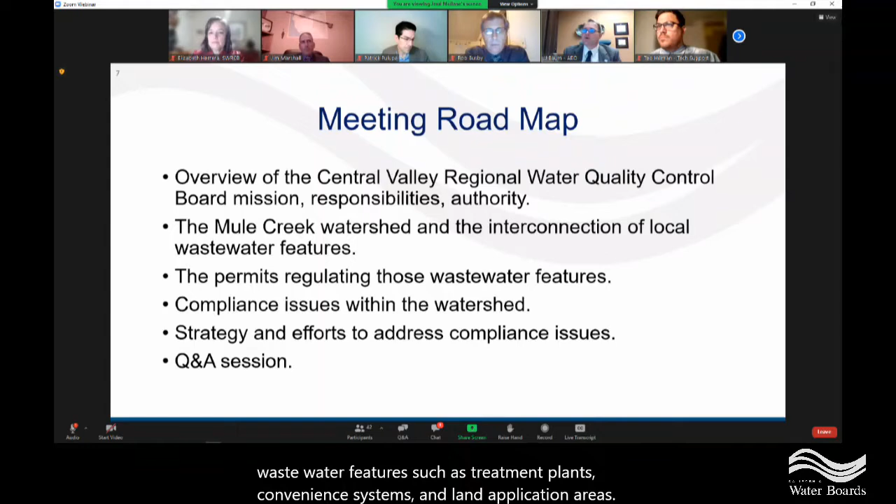We'll start our discussion with the Regional Board's mission, responsibilities, and authorities as they pertain to water quality. My staff will then give a high-level description of the Mule Creek Watershed, including the wastewater features such as treatment plants, conveyance systems, and land application areas. These features are regulated by our board through various permits to ensure the conveyance, treatment, and disposal of wastewater does not impact water quality. Our office issues permits to wastewater facilities that contain requirements to ensure water quality is protected. Because of the variety of wastewater facilities we regulate, our office has several programs, each covering a different category or type of facility.

Due to the many operations going on in the Mule Creek Watershed, several of these programs are part of our discussion. We will hear a bit about each type of permit from the folks that work in those programs, including the Land Disposal Program, the Municipal Stormwater Program, and the Sanitary Sewer System Program. Once we get through that background, we will hear from our Compliance and Enforcement section about some of the issues that have been occurring in the Mule Creek Watershed. And finally, we will present our progress tackling these issues so far and our plans going forward.

After that, we will open up the floor to hear from you for a question and answer session. Keep in mind that this is a complicated watershed with a lot of interconnected facilities and moving parts. We have kept this presentation high level to provide a digestible but meaningful overview of the complete situation that won't take all night. However, if you would like a more detailed discussion about any of these topics, staff would be happy to have those conversations with you and are available by phone or email.

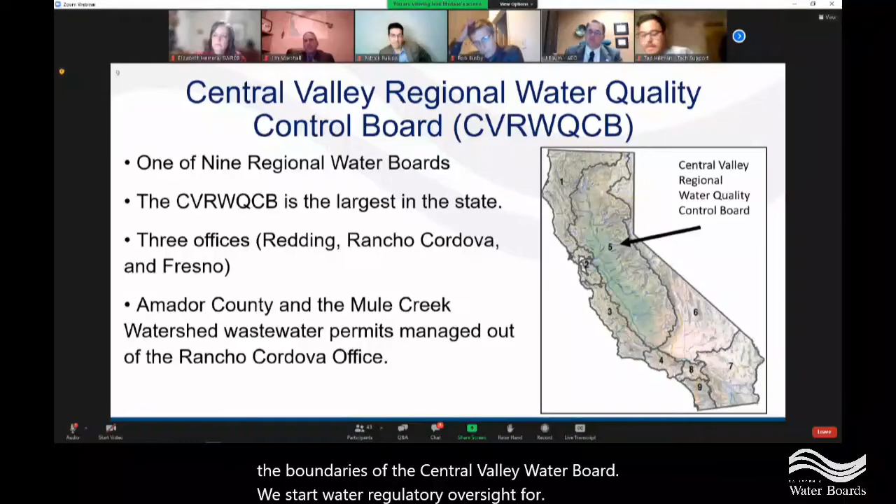So I'd like to state our Central Valley Board's mission statement: to preserve, enhance, and restore the quality of the Central Valley region's water resources for the protection of the environment, public health, and all beneficial uses, for the benefit of present and future generations.

Our agency is responsible for the implementation and enforcement of water quality regulations within our region. These include the Federal Clean Water Act, through the issuance of National Pollutant Discharge Elimination System permits that regulate discharges to surface waters. This is done in partnership with the United States Environmental Protection Agency, or US EPA. Additionally, we regulate discharges to surface and groundwater through the California Water Code, or Porter Cologne Act. Please note that our regional board does not regulate drinking water; that is done by the Division of Drinking Water through the State Water Board.

We use many tools to effectively implement these regulations on surface and groundwater, including permits, establishing waste discharge requirements, and even issuing enforcement orders to those not meeting their discharge requirements. Several of these tools we will be discussing today and how they are used by our staff in the Mule Creek watershed. Additionally, we wanted to share some of the actions we have taken to protect and better understand the water quality in your watershed.

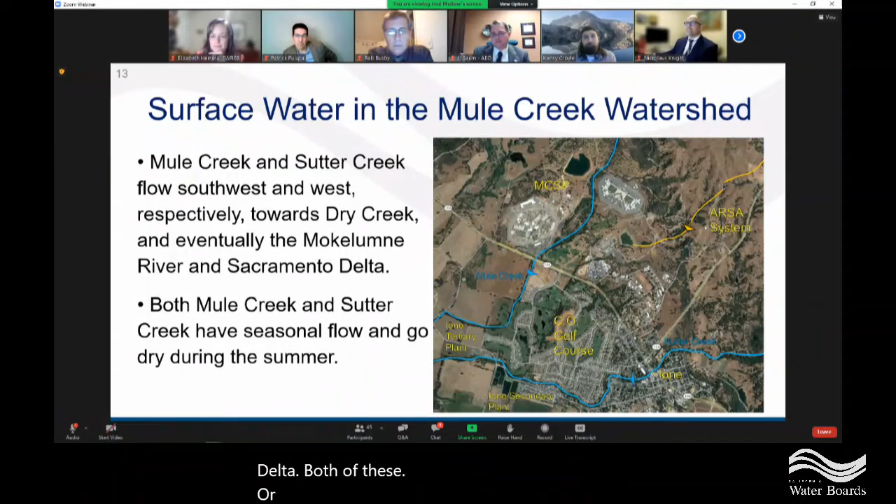Groundwater recharge occurs in the local watershed through percolation of treated wastewater or effluent from storage and disposal facilities. I'll give you a brief summary of these features and the facilities that contribute to groundwater recharge, and then show you how they're all interconnected on the next slide.

There are two large unlined storage reservoirs at the Mule Creek State Prison. The Castle Oaks Golf Course has several smaller unlined storage ponds as well. The City of Ione wastewater plant also has two unlined ponds, which are operated as percolation basins.

Land application areas used for the spray irrigation of effluent are located at Mule Creek State Prison property and at the City of Ione wastewater treatment plant. The Castle Oaks Golf Course also spray irrigates with tertiary treated effluent, which we will talk about more in a minute. Residential landscape irrigation in the neighborhoods also contributes to groundwater recharge.

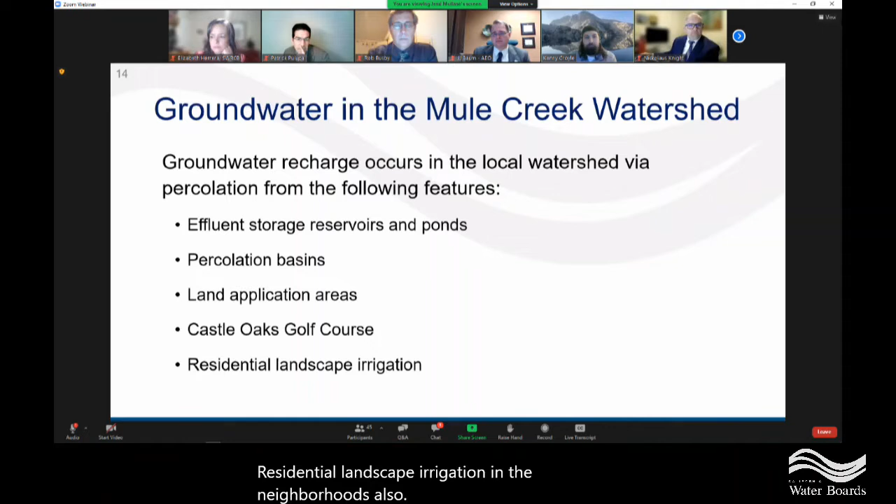In the lower right-hand corner, the City of Ione treatment plant receives wastewater from the city sewer system and sometimes Preston Reservoir, which it treats and then disposes of on its own percolation ponds or on-site spray fields.

In the upper right corner, the City of Sutter Creek sends treated wastewater through the ARSA conveyance system to Preston Reservoir. From there, the effluent can be either sent to the City of Ione plant or the tertiary plant for further treatment.

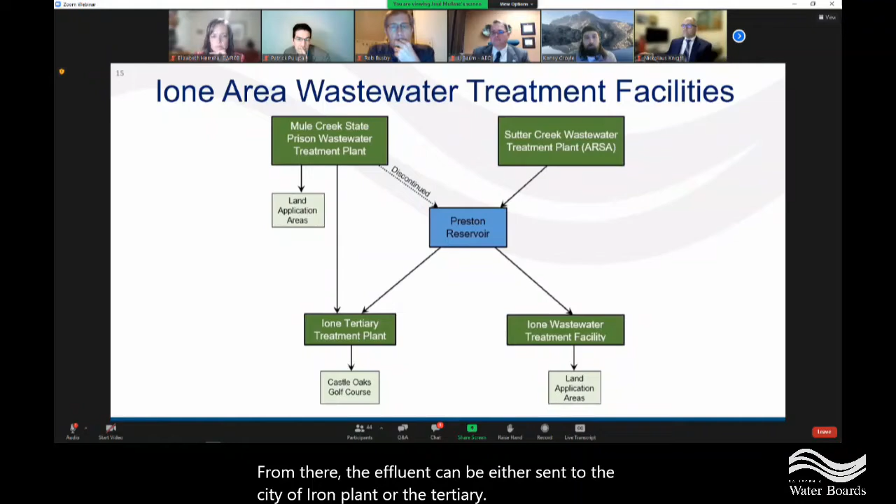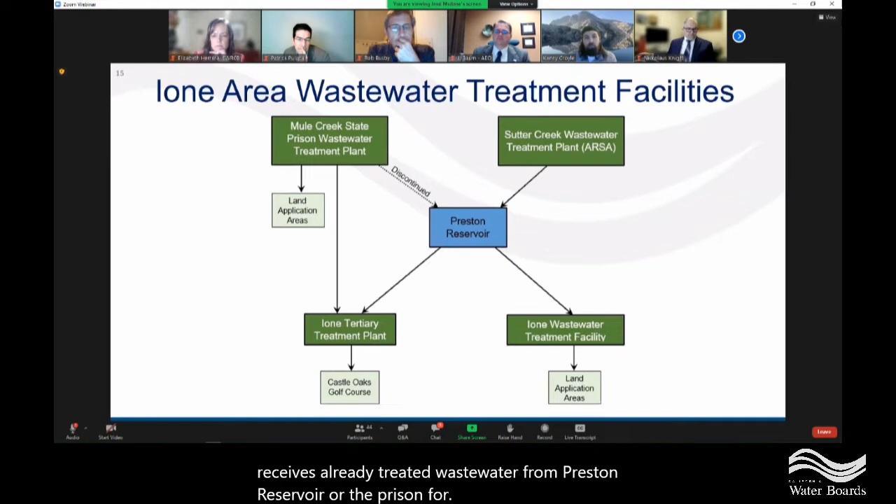In the lower left corner, the Ione tertiary plant receives already treated wastewater from Preston Reservoir or the prison for further treatment and eventual reuse on the Castle Oaks Golf Course. Tertiary treated water can be used to irrigate public spaces such as golf courses under certain conditions.

As you can see, these facilities are all connected, but not all of these connections are active all of the time. Water is intermittently transferred between the facilities based on agreements between the parties, usually during the summer months to reduce volume of stored effluent in the reservoirs and to irrigate the golf course.

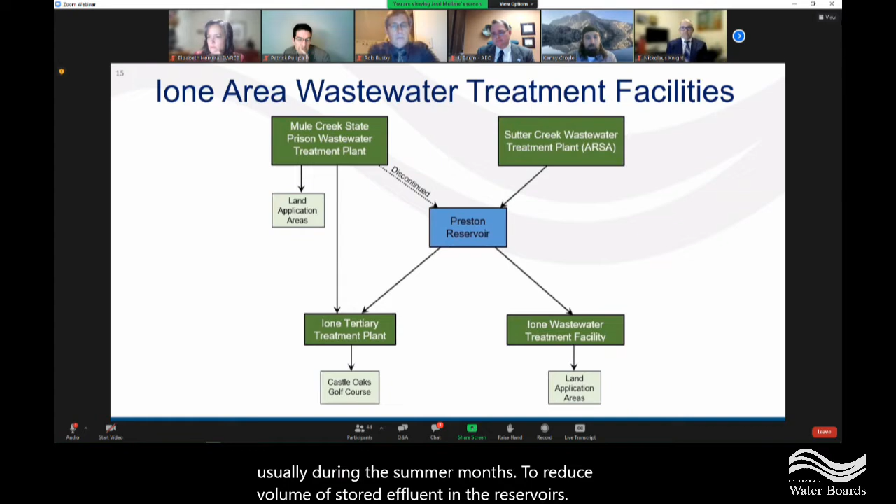Now I'm going to hand it off to Scott Armstrong to talk to you a little bit about the permits that regulate the wastewater operations at these facilities.

Thank you, Kenny, and good evening. My name is Scott Armstrong. I am a senior engineering geologist and manager of the Waste Discharge to Land Permitting Unit here in the Central Valley Water Board. In the next few slides, I'm going to summarize this program and provide a status of our permitting activities for the wastewater facilities discussed during this presentation.

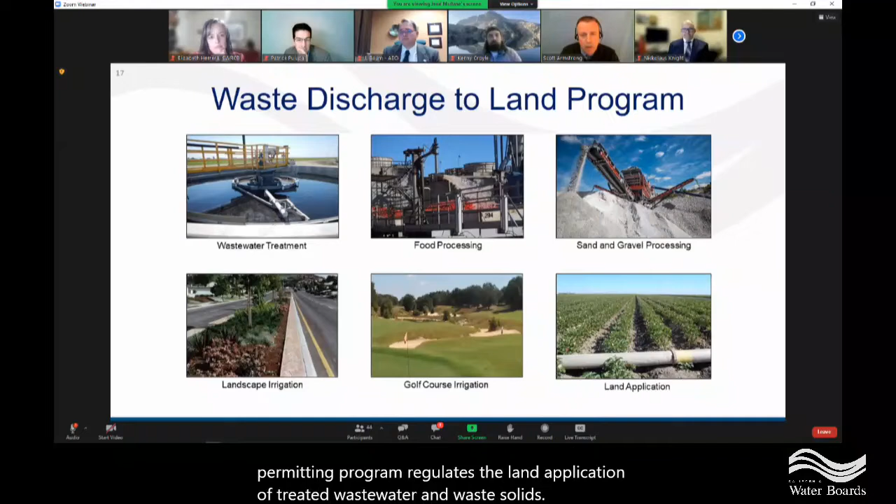The Waste Discharge to Land Permitting Program regulates the land application of treated wastewater and waste solids to protect groundwater, which is considered a beneficial resource. This is achieved by developing and issuing permits that allow land disposal or the reuse of waste products in a manner that does not negatively impact groundwater quality.

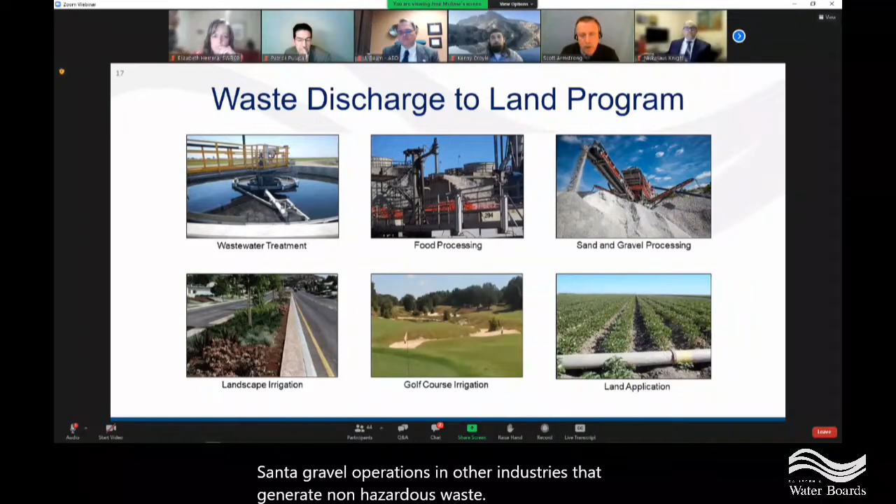Permittees include sewage treatment and wastewater recycling facilities, food processors, sand and gravel operations, and other industries that generate non-hazardous waste. This program currently regulates over 1,400 facilities in the Central Valley.

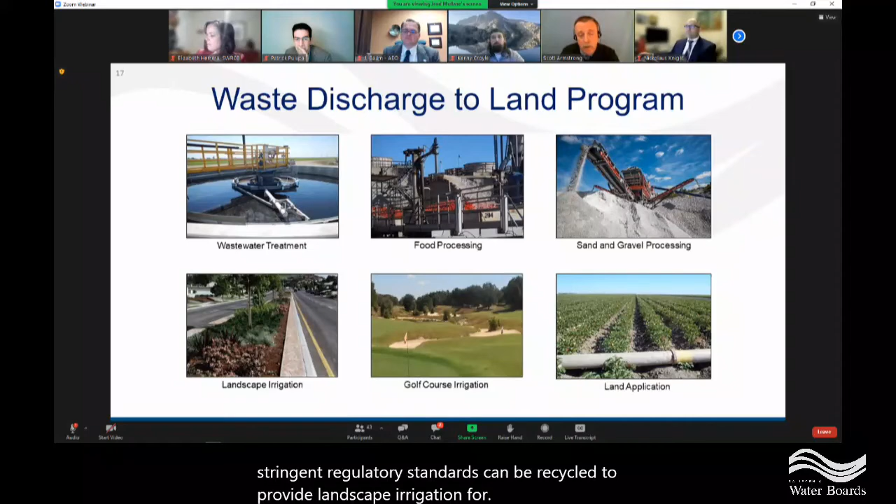One of the priorities of the Water Board is to protect water resources here in the Central Valley. Thus, discharging some waste types to land is allowed to support water conservation efforts, provide supplemental irrigation, and reduce overloading of local landfills. For example, treated wastewater that meets stringent regulatory standards can be recycled to provide landscape irrigation for highways, parks, and golf courses.

As Kenny previously mentioned, the Ione area includes several wastewater treatment facilities that discharge treated wastewater to land. These include the Mule Creek State Prison Wastewater Treatment Plant, the City of Ione Tertiary Treatment Plant, the City of Ione Wastewater Treatment Facility, and the City of Sutter Creek Wastewater Treatment Plant, which is managed by the Amador Regional Sanitation Authority, also called ARSA.

I want to take a moment here to explain the terminology we use for these different levels of wastewater treatment. Secondary treatment utilizes biological and physical methods to break down organic compounds. Tertiary treatment includes those processes in addition to filtration to further reduce residual waste components to achieve better water quality. Disinfection is then applied to destroy pathogens and remaining organic compounds, including viruses.

Title 22 of the California Code of Regulations defines ways that recycled water can be used, depending on the level of treatment.

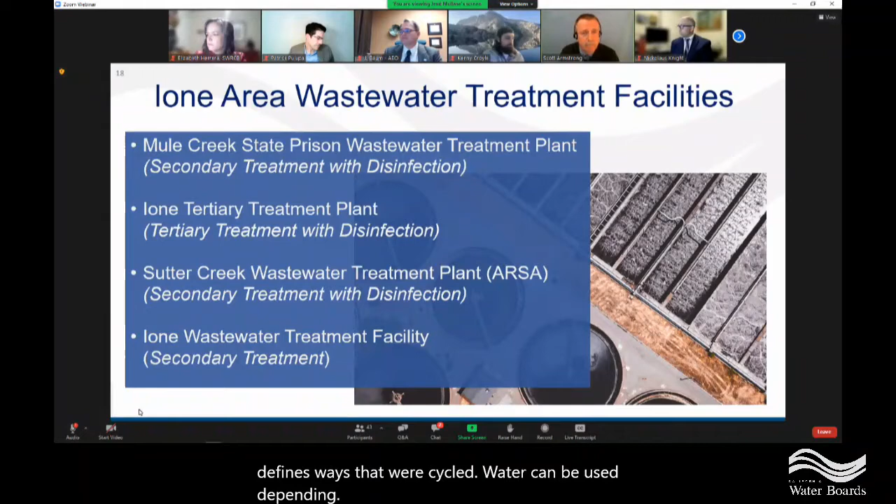The permit mechanism that allows waste discharge to land is called Waste Discharge Requirements, or WDRs. The WDRs require that all waste applied to land meet specific treatment standards and comply with allowable limits that are protective of groundwater.

These requirements include treatment levels that must be achieved and limits on the volume of water that can be discharged to prevent flooding or overloading of soils. Other protective measures include restrictions on nuisance odors and setback requirements from property boundaries, domestic water wells, and surface water, such as creeks.

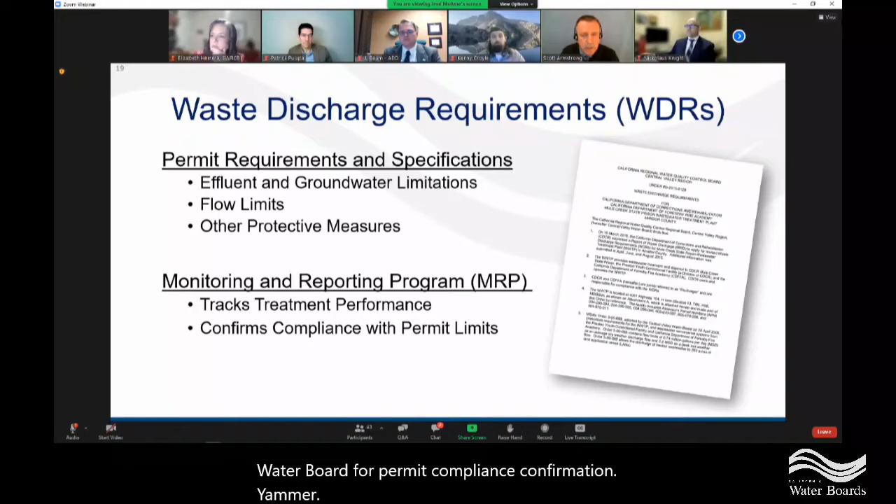All WDRs include what's called a monitoring and reporting program, or MRP, that is used to verify compliance with the requirements set forth in the permit. The MRP includes requirements for routine sampling at various stages in the treatment and disposal process, laboratory testing, and reporting of the results to the Central Valley Water Board for permit compliance confirmation. The MRP also requires routine visual inspections of treatment and land discharge activities.

All WDRs need to be periodically updated to accommodate changes in treatment facility operations and new regulatory requirements. The permitting process typically begins with the owner of a wastewater treatment facility preparing a report of waste discharge. This document summarizes information about the waste character, the type of treatment at the facility, the expected annual flow, and how the treated waste will be discharged to land without negatively impacting groundwater or creating nuisance conditions.

Permitting staff review this document along with all relevant monitoring data to develop a draft permit. Once prepared, the draft permit is reviewed by Water Board management before being made available for public review. After all comments have been collected and evaluated, the permit is updated to reflect any appropriate revisions and presented to our board for their consideration and formal adoption during a public meeting.

Permit development is a deliberative process that must address all applicable requirements, stakeholder concerns, and ensure that compliance can be reasonably achieved. The typical process time for preparing new or revised WDRs can vary depending on the backlog of other permits, project complexity, and staff availability. Prioritization for updating and preparing new permits is based on the threat to water quality.

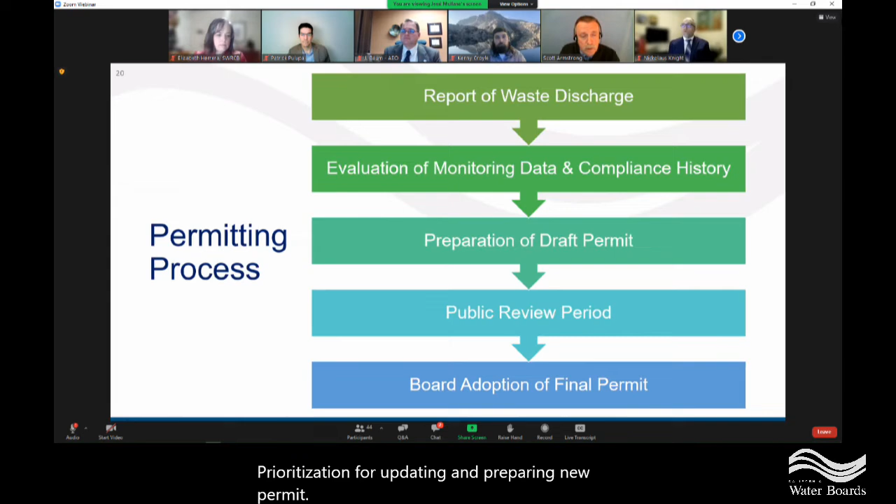So where are we at currently with the permitting process? In October 2021, revised monitoring and reporting programs were issued for Mule Creek State Prison Wastewater Treatment Plant and the City of Ione Tertiary Treatment Plant, which includes the Castle Oaks Golf Course.

The purpose of revising these monitoring requirements is to collect more comprehensive data in advance of updating the WDRs for these two facilities. In the coming months, the additional monitoring data will be reviewed by staff to determine the appropriate requirements and limits for the protection of groundwater quality.

Water Board staff are also currently reviewing a report of waste discharge recently submitted for the Mule Creek State Prison. The complicated relationship between Mule Creek State Prison, the City of Ione, and the Amador Regional Sanitation Authority requires careful coordination by the Central Valley Water Board to assure that all Ione area communities have reliable wastewater disposal that does not negatively impact groundwater. This concludes my portion of this evening's presentation.

And from here, I'd like to transition over to Elizabeth Lee, who will discuss the municipal stormwater system.

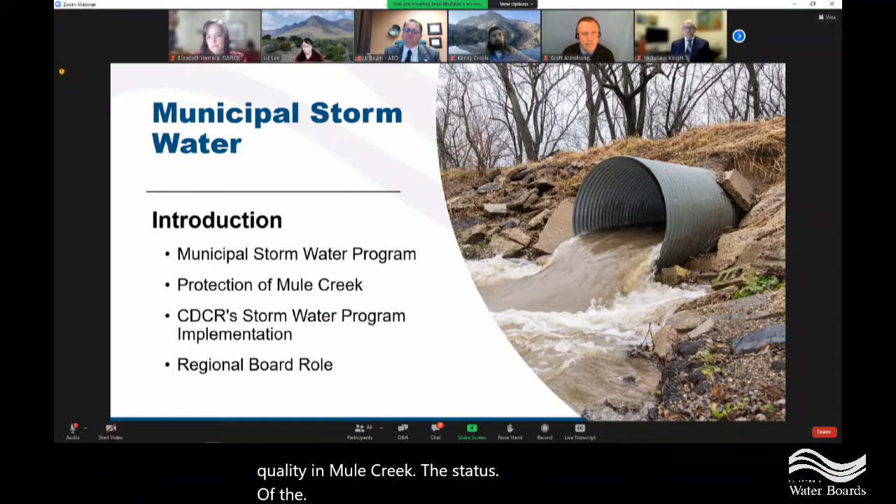In this presentation, I will cover a little background on the stormwater program, specifically the municipal stormwater program area, how stormwater regulation is important to protect water quality in Mule Creek, the status of the implementation of the stormwater program by the California Department of Corrections and Rehabilitation, or CDCR for short, and what regional water board staff are doing to ensure compliance.

So just a bit of background on the municipal stormwater program. The purpose of the program is to protect water bodies such as Mule Creek by minimizing impacts from stormwater systems. In 2019, the regional board required CDCR to obtain a stormwater permit from the State Water Board due to evidence that CDCR's activities were impacting Mule Creek.

The stormwater permit is an important tool because it has specific requirements for CDCR to reduce the stormwater impacts to Mule Creek, and it provides clear regional board enforcement authority to ensure the necessary improvements to the facilities and processes are completed by CDCR. The stormwater permit is a 5-year process to establish a full stormwater program, and CDCR is currently in their 4th year of stormwater program development.

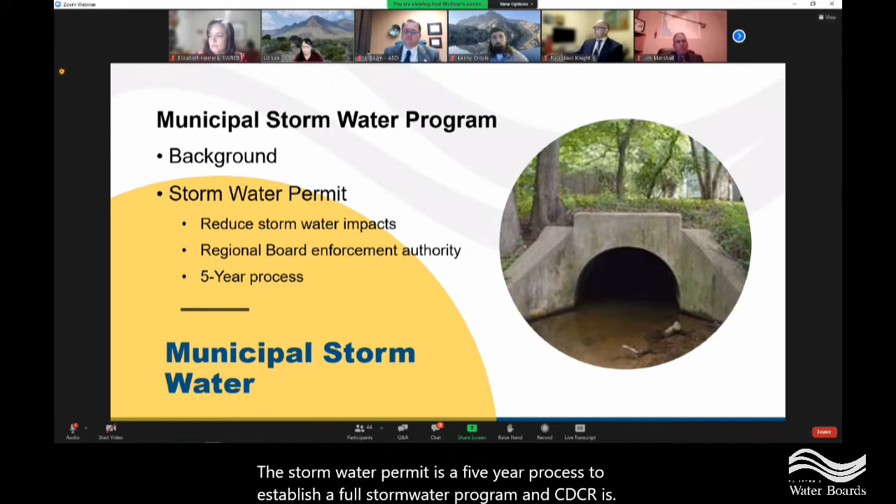Monitoring is not required under the stormwater permit, but due to concerns of stormwater impacts to Mule Creek while the stormwater program is in the process of being developed, the regional board issued a stormwater monitoring and reporting program to CDCR. This program requires monitoring of bacteria and other contaminants from CDCR's stormwater and in Mule Creek.

In addition, this program is used to evaluate CDCR's progress by providing data that shows stormwater quality improvement from the prison. So far, the program has resulted in CDCR determining the need for permanent structures to obtain accurate monitoring data and reducing excessive irrigation runoff during the dry season.

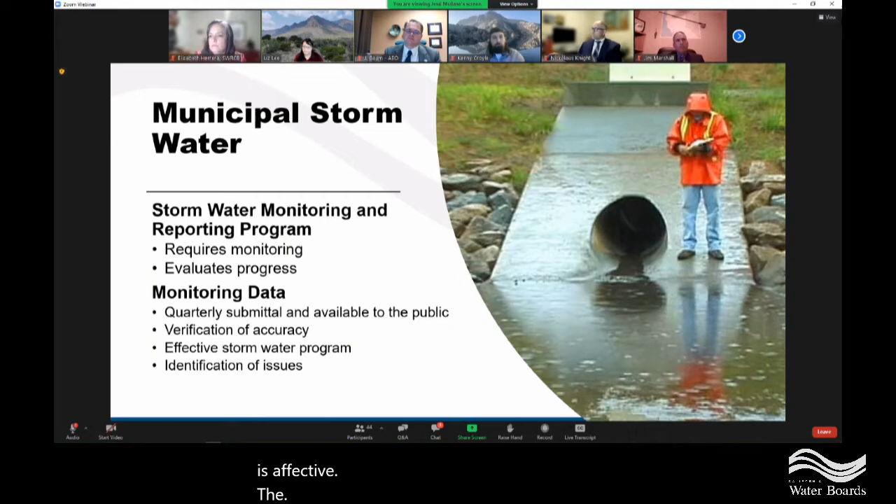Monitoring data are submitted to the regional board quarterly and are available to the public. The data are reviewed by regional board staff to verify accuracy and that CDCR's stormwater program is effective. The data is also used to identify any issues with their stormwater program.

Moving forward under the stormwater permit, CDCR will annually report on the implementation and improvements made to their stormwater program, and regional board staff will review these reports to ensure that the stormwater program is being properly implemented. By June 30, 2023, CDCR must have a fully developed stormwater program in place.

Under the Stormwater Monitoring and Reporting Program, quarterly verification of CDCR's stormwater program effectiveness will be reviewed by regional board staff. If the Stormwater Monitoring and Reporting Program does not demonstrate reduction in contaminants from the storm sewer system, CDCR will be required to develop and implement additional practices and processes and installation of storm sewer structural improvements.

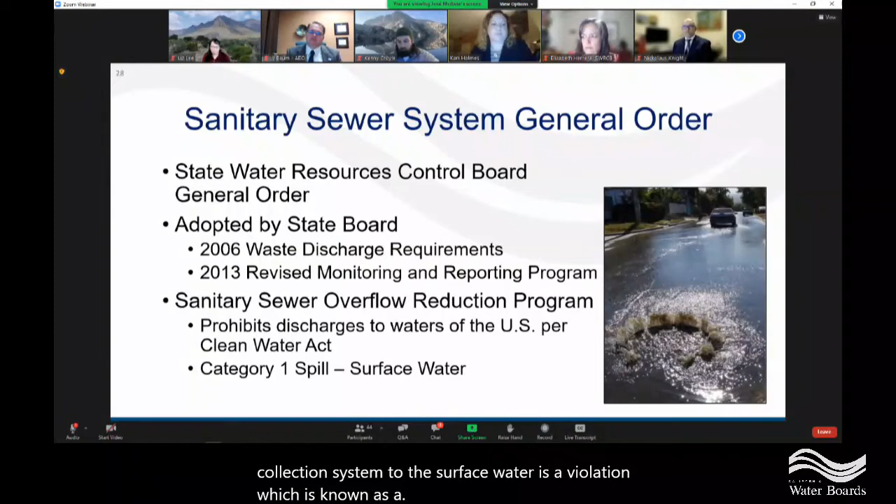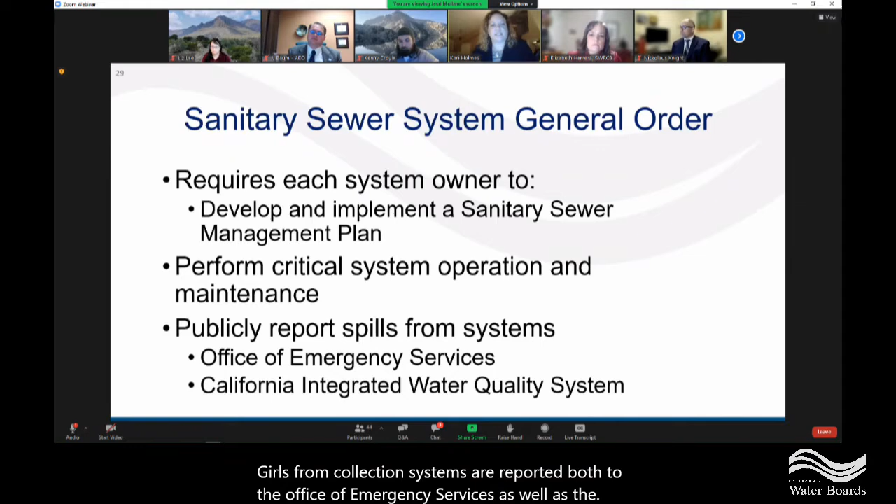Dischargers enrolled in the Sewer System General Order are required to develop and implement a sanitary sewer management plan, perform critical system operation and maintenance, and publicly report spills from collection systems. Spills from collection systems are reported both to the Office of Emergency Services as well as the Water Board's California Integrated Water Quality System database.

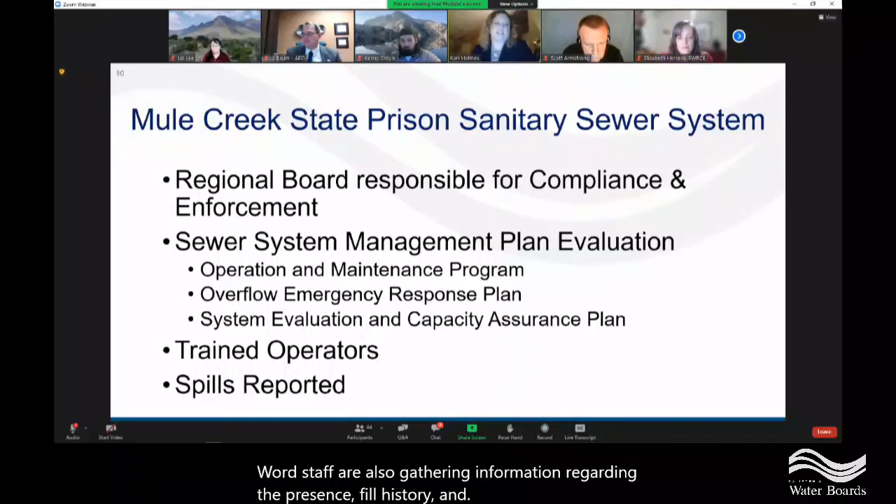Central Valley Regional Board enforcement staff are currently working to assess CDCR's compliance with the Sanitary Sewer System General Order. We are assessing compliance to ensure an adequate sanitary sewer management plan, which includes an operation and maintenance program, overflow emergency response plan, and system evaluation and capacity assurance plan, is in place, and that all facility staff have the appropriate training. Board staff are also gathering information regarding the prison's spill history and records of maintenance and repairs of their sanitary sewer collection system.

Now I will discuss compliance and enforcement efforts that have been taken, as well as ongoing compliance evaluations and next steps.

On December 28th of 2017, board staff received a complaint via phone call regarding an alleged illegal discharge of water from an unknown source directly into the perimeter stormwater system and subsequently entering Mule Creek. The complaint was from a third-party construction contractor who is completing a project to upgrade the perimeter stormwater ditch to an underground culvert and vault system.

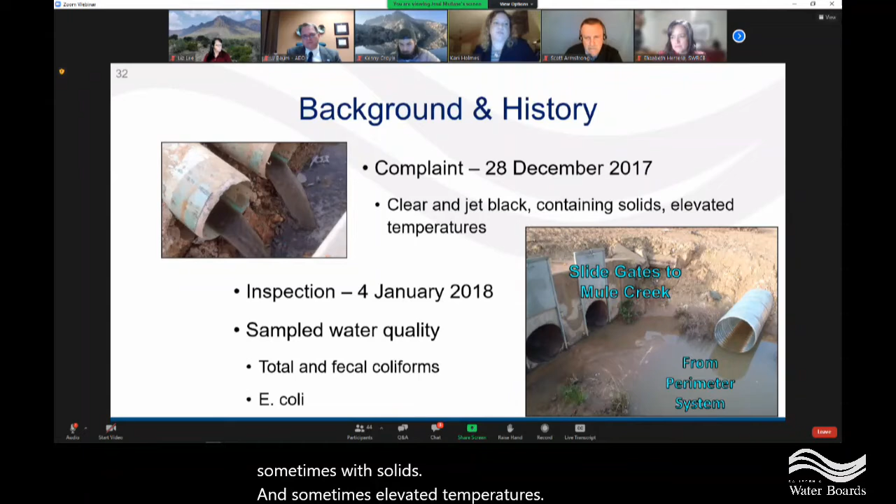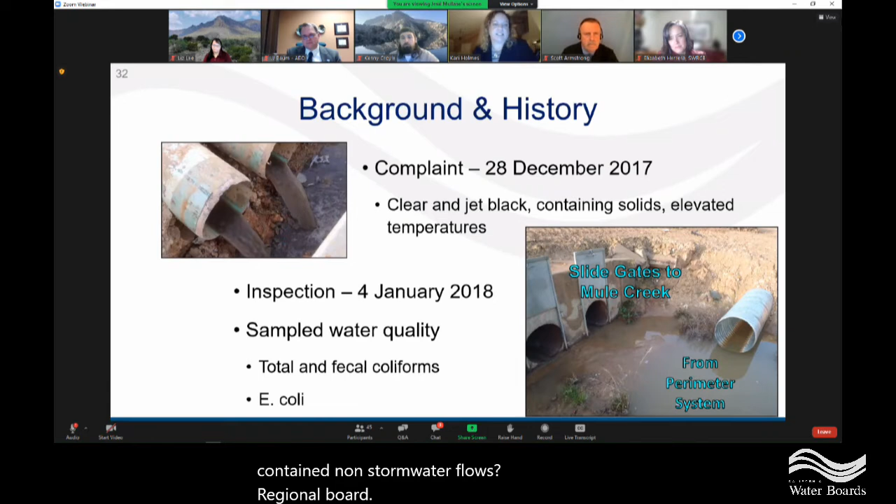Based on the complaint and supporting documents, board staff believe the source or sources may have contained non-stormwater flows. Regional board staff were able to conduct an inspection on January 4th, 2018. During the inspection, board staff observed discharges to the perimeter system similar to what was described in the complaint.

Board staff collected 2 samples from the stormwater system, which were analyzed for typical wastewater and stormwater parameters. Notably, total coliforms, fecal coliforms, and E. coli were detected at levels above water quality objectives.

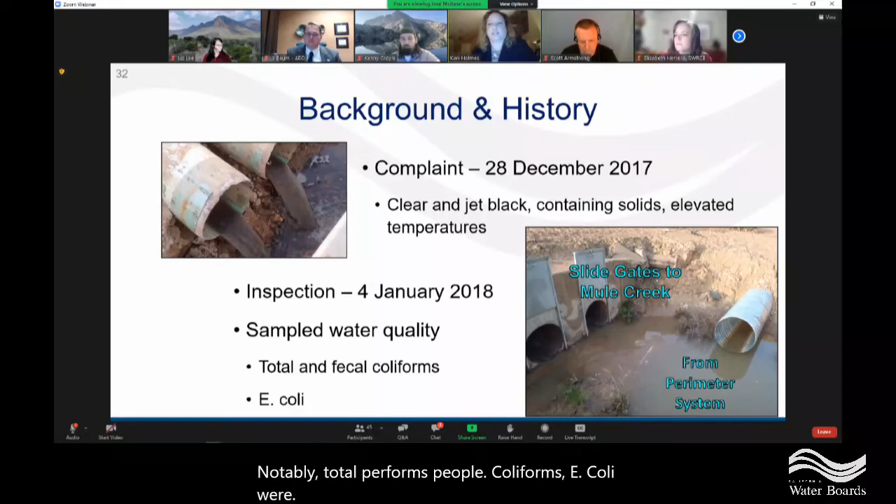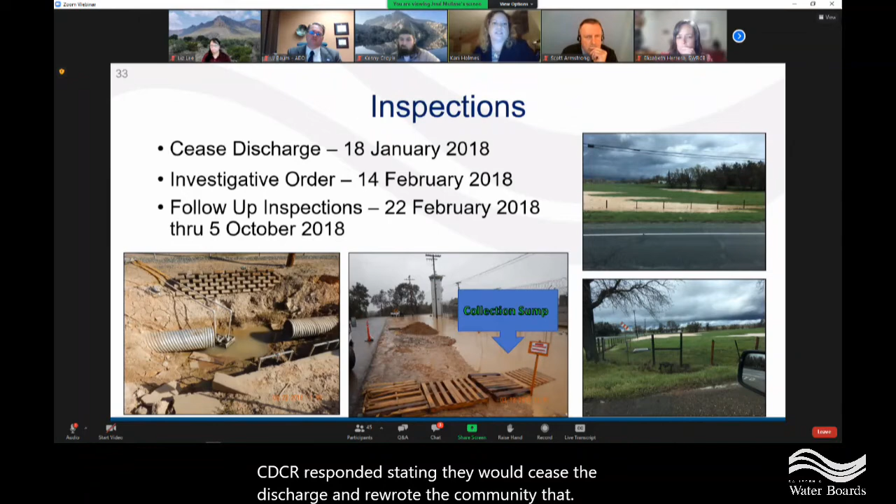As a result of the detected coliform, CDCR was instructed to cease the discharge via email on January 18, 2018. CDCR responded stating they would cease the discharge and reroute the contaminated stormwater to sewer cleanouts that lead to the on-site domestic wastewater treatment plant.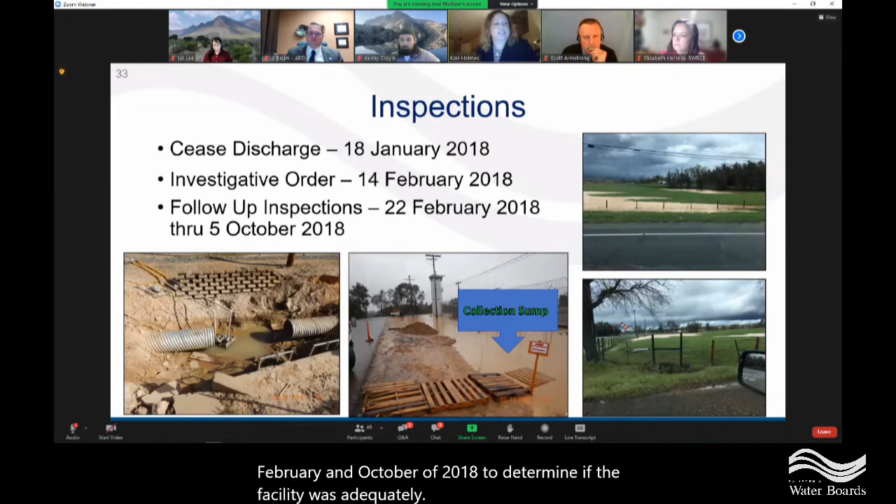In addition, the regional board issued an investigative order on February 14, 2018, that required CDCR to conduct a survey of their collection systems, also to collect water samples and investigate the source of the non-stormwater discharges. Board staff performed several inspections between February and October of 2018 to determine if the facility was adequately prepared for forecasted rain events and how the interim measures performed during the wet weather.

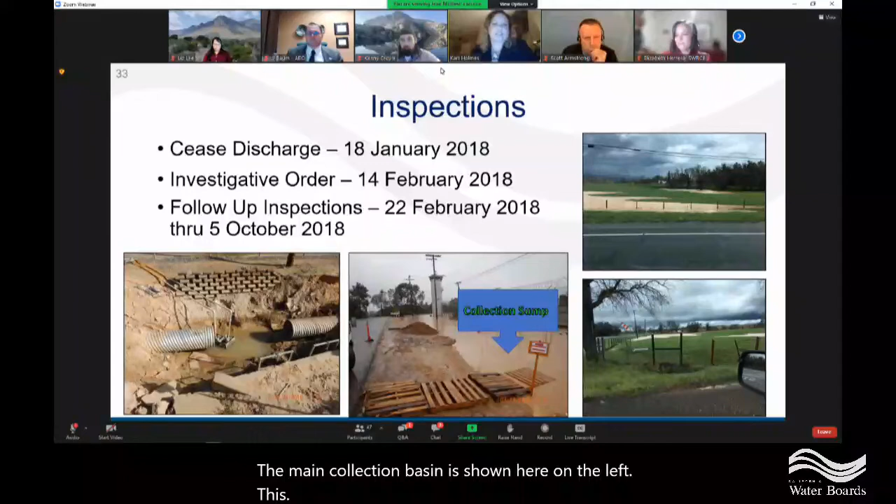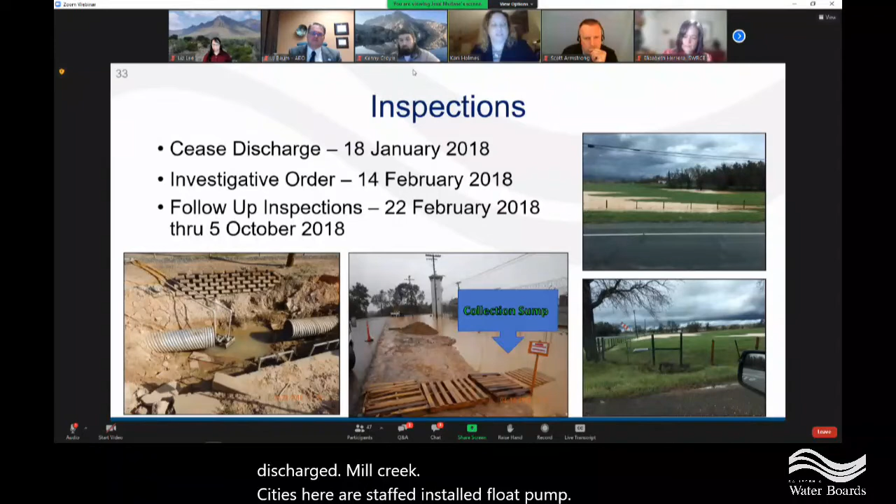The main collection basin is shown here on the left. The slide gates in the foreground of the stormwater collection basins had been closed, preventing discharge to Mule Creek. CDCR staff had installed float pumps to pump out stormwater to nearby sewer laterals. Board staff again inspected the interim disposal measures as shown in the middle photo. Although the pumps were working, flooding was still occurring.

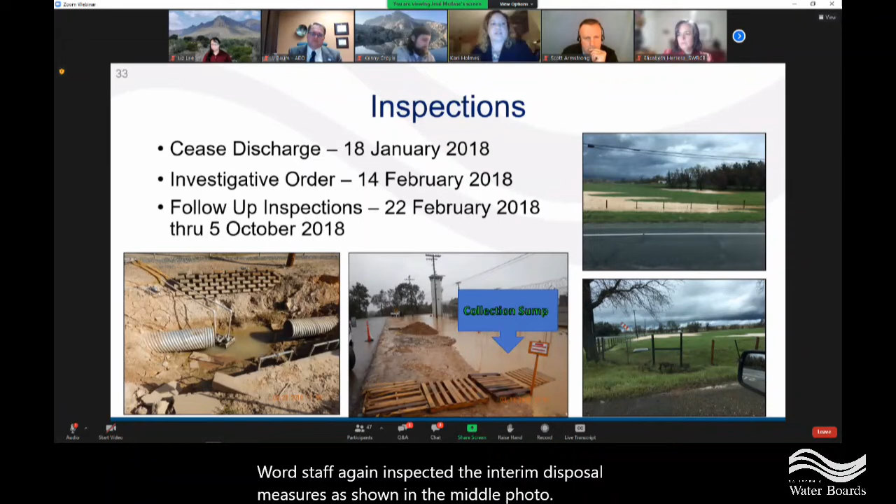Lastly, the two photos on the right-hand side show some of the ponded stormwater on adjacent fields off property.

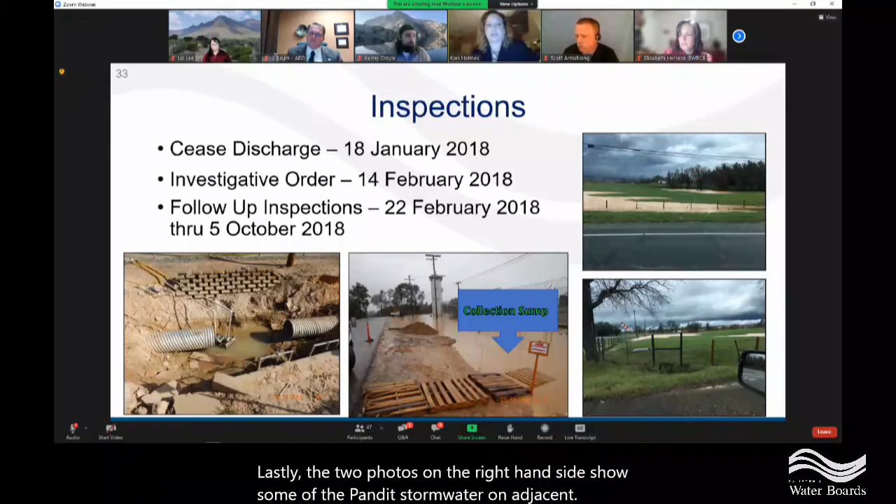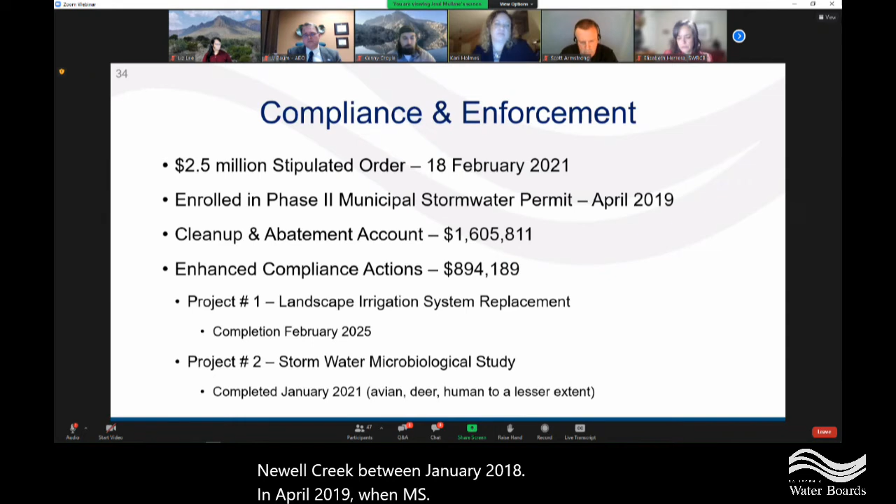As many of you are aware, the board adopted a settlement on February 18, 2021 against CDCR for $2.5 million for unpermitted discharges to Mule Creek between January 2018 and April 2019, when MS4 enrollment occurred. The proposed order stipulates to $2.5 million in total penalties, with approximately $1.6 million of penalties paid to the state board's cleanup and abatement account, and $900,000 was suspended in lieu of completion of two enhanced compliance actions.

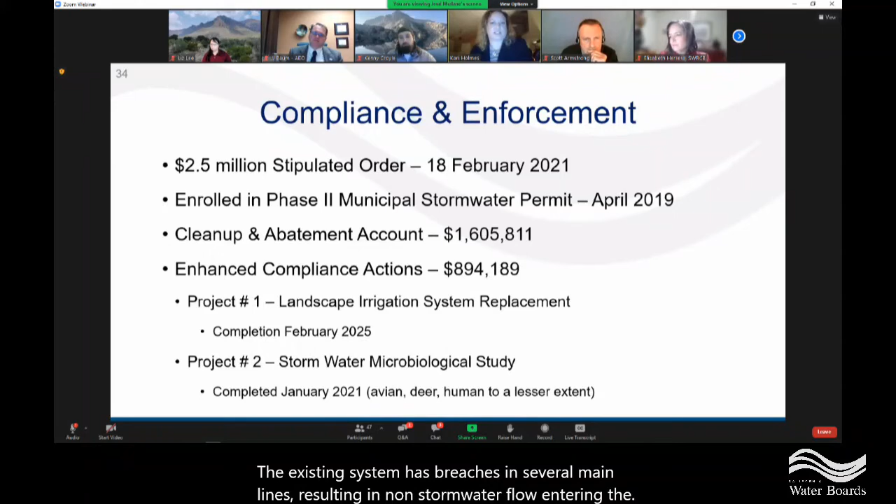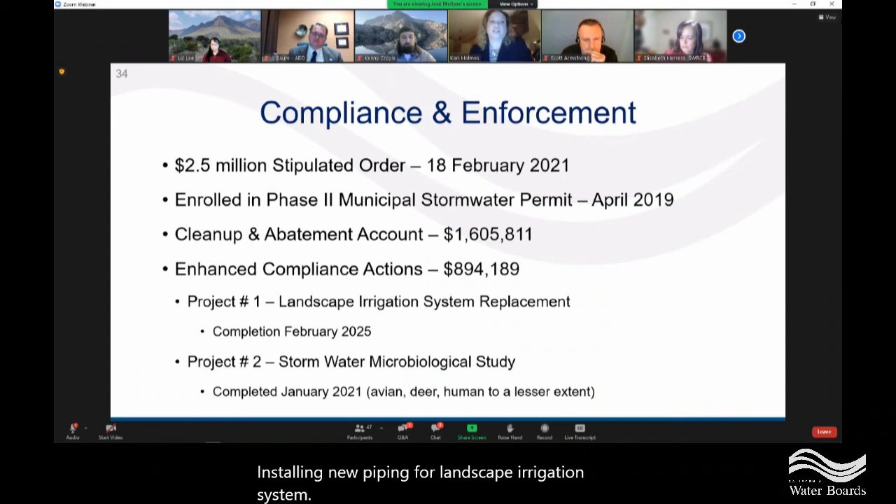The first enhanced compliance action is a project that will replace the landscape irrigation system at Mule Creek State Prison, which has exceeded its useful life. The existing system has breaches in several main lines, resulting in non-stormwater flow entering the prison's stormwater collection system, which may eventually discharge into Mule Creek. Installing new piping for the landscape irrigation system will have the effect of eliminating non-stormwater flows resulting from irrigation into Mule Creek.

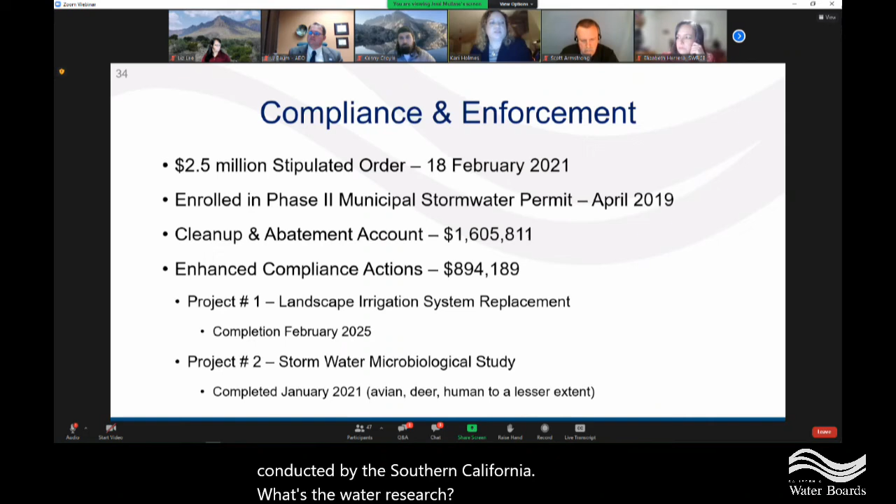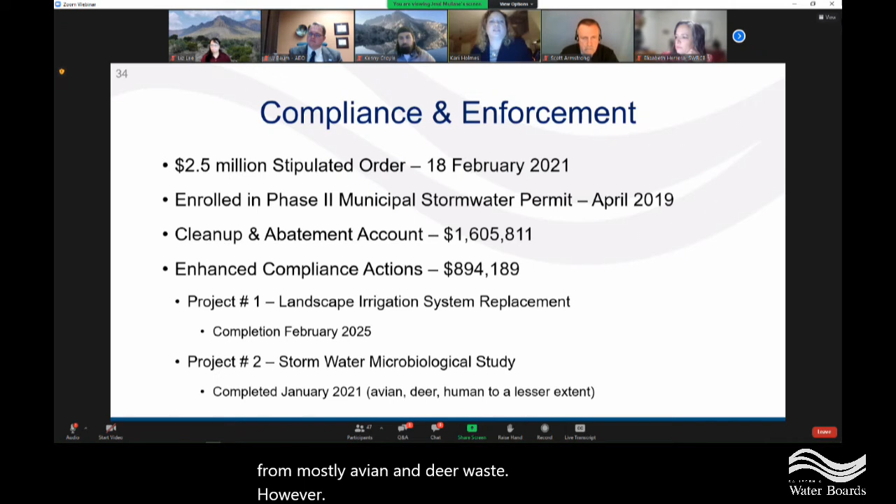The second enhanced compliance action was a study to characterize the microbiological quality of the prison stormwater collection system discharges, conducted by the Southern California Coastal Water Research Project. Ultimately, the results of this study showed the main sources of coliform in Mule Creek stemmed from mostly avian and deer waste. However, human waste markers were also identified in Mule Creek, but to a much lesser extent.

This settlement only addresses discharge violations prior to obtaining coverage under the MS4 permit and is the first step in the regional board's process of bringing CDCR into compliance with their water board permits. The settlement is not intended to be a regulatory mechanism by which corrective actions will be required.

As such, the regional board has formed an internal strategic work group comprised of representatives from all applicable programs to address ongoing compliance issues, which will include corrective actions as needed. The regional board, state board, and US EPA are collaborating across multiple programs as we are continuing to meet and identify next steps.

So what steps has the regional board taken aimed at ensuring compliance with water quality in the Ione area? As you've heard already from regional board staff, compliance actions and water quality monitoring are still ongoing under several water board programs. The stormwater program has enrolled CDCR's Mule Creek State Prison in the municipal stormwater permit, issued an order requiring additional monitoring and reporting, and is currently reviewing the non-stormwater discharge report and elimination plan submitted by CDCR in February and September of this year.

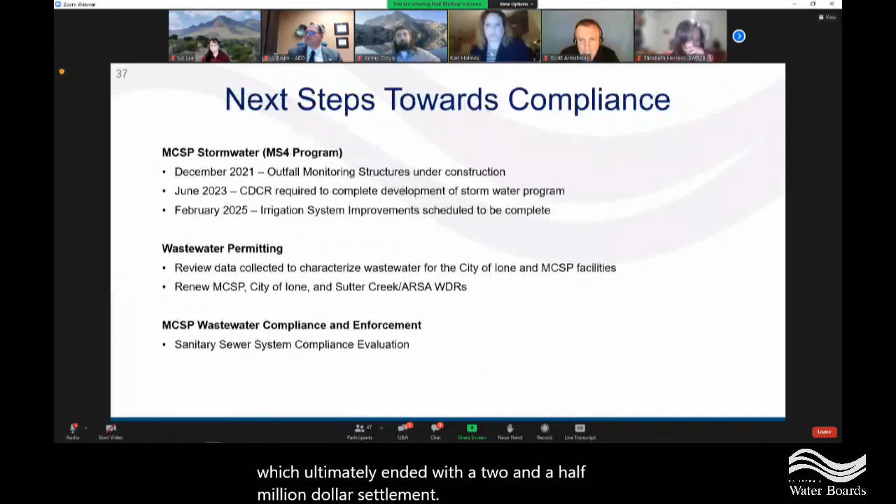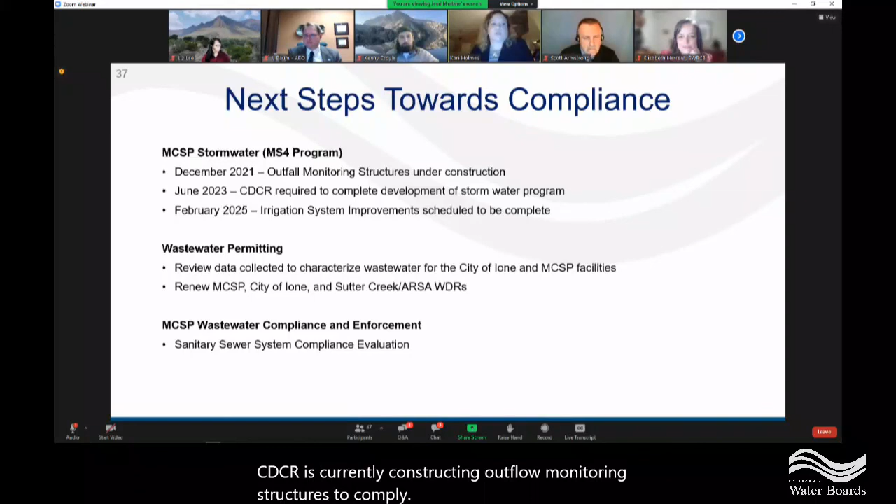So what's next? CDCR is currently constructing outfall monitoring structures to comply with regional board stormwater orders. They're developing a stormwater program, and they'll be completing the irrigation system improvements as allowed by the settlement agreement.

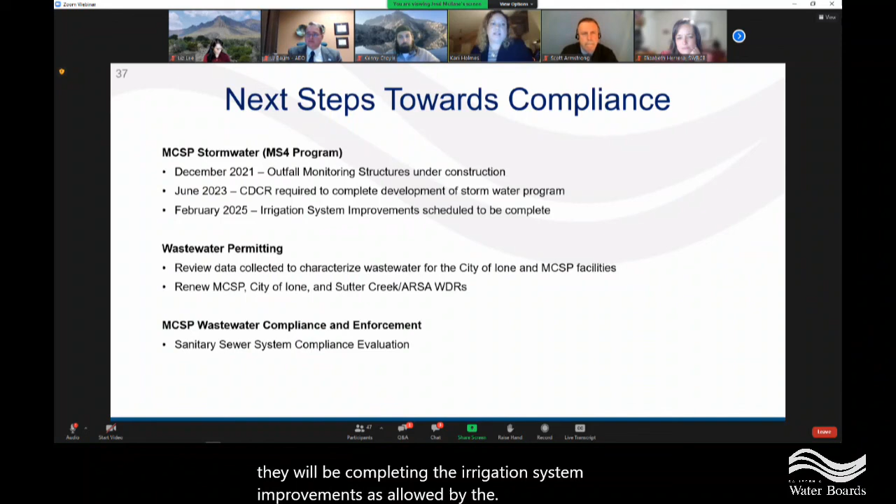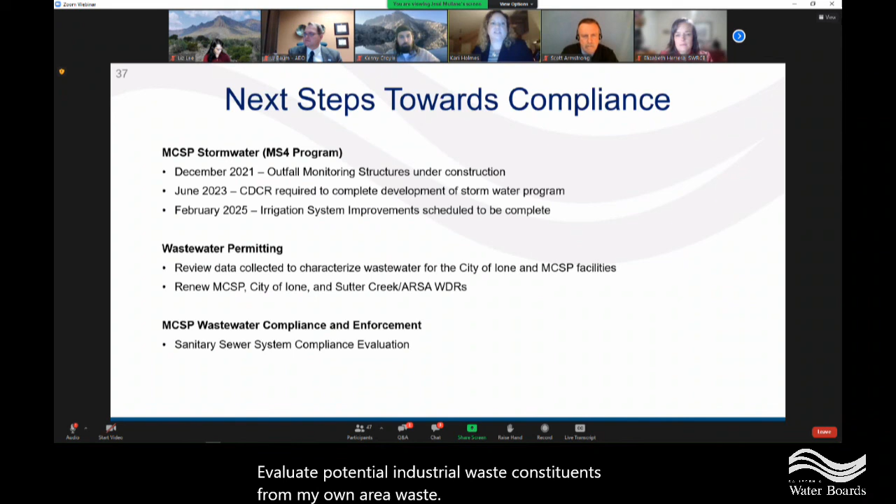In addition, waste discharge requirements regulating discharges from the Ione area wastewater facilities are scheduled to be renewed in the near term, which is intended to address potential groundwater impacts from land application areas, better understand industrial waste streams, evaluate potential industrial waste constituents from the Ione area wastewater treatment plant, and address insufficiently sized and maintained spray fields.

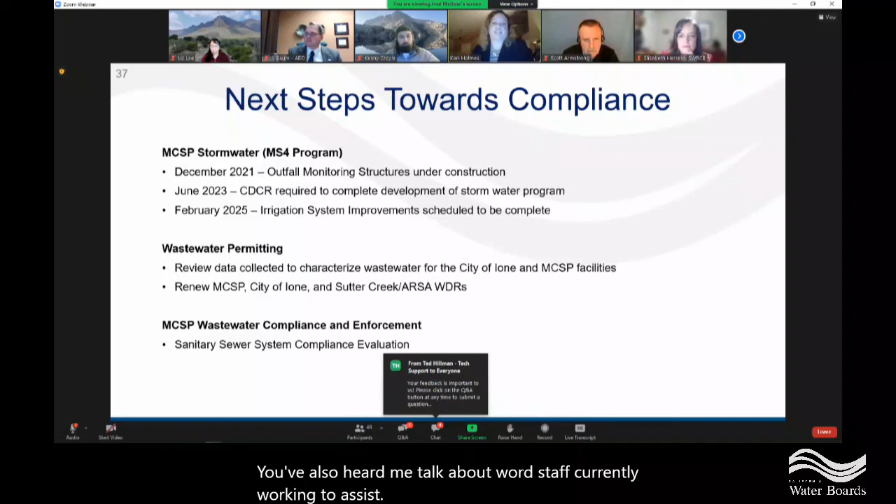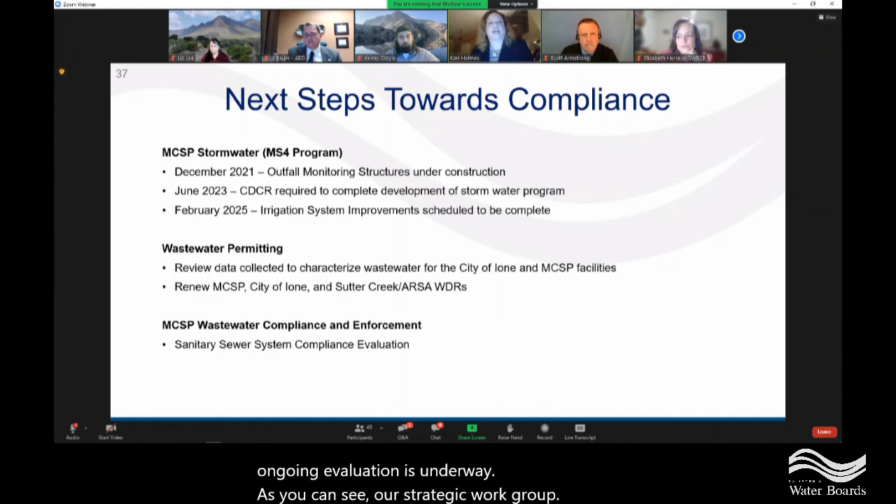You've also heard me talk about board staff currently working to assess the prison's compliance with the Sanitary Sewer System General Order, where an ongoing evaluation is underway. As you can see, our strategic work group has a lot of ongoing efforts we are actively engaged in to ensure water quality is protected and safe in your community.